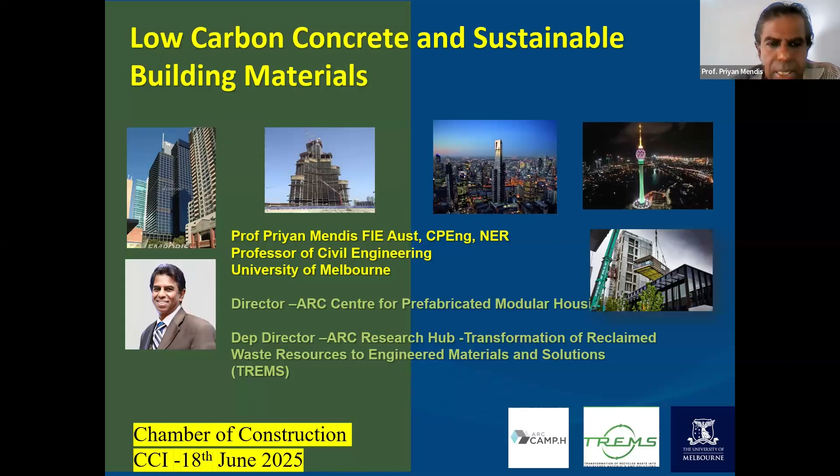On the left-hand side, the top, is where I entered the concrete industry after my PhD, when I was working as the structural engineer and also project engineer for this building, Telecom Corporate Building, is where I started using very high-strength concrete - first time in Australia I used high-strength concrete. The one on the right-hand side is also at the Telecom Corporate Building where I was a project engineer.

In that project, I had a chance to introduce 65 MPa concrete. Even at that time, we didn't know much about very low carbon concrete, but I tried my best to be sustainable. Sustainability was a name we all knew, but I think we have gone a lot further now, which I will talk about today.

On the left-hand side is Petronas Tower. That's where, when I was studying, I had exposure to one of the best concrete technologies in the world. I need to acknowledge one of my mentors, Ken Day, who has visited Sri Lanka. He got me involved in the foundations of the Petronas Twin Towers, even while I was studying at Monash. With that introduction, I learned a lot from him working on that foundation structure.

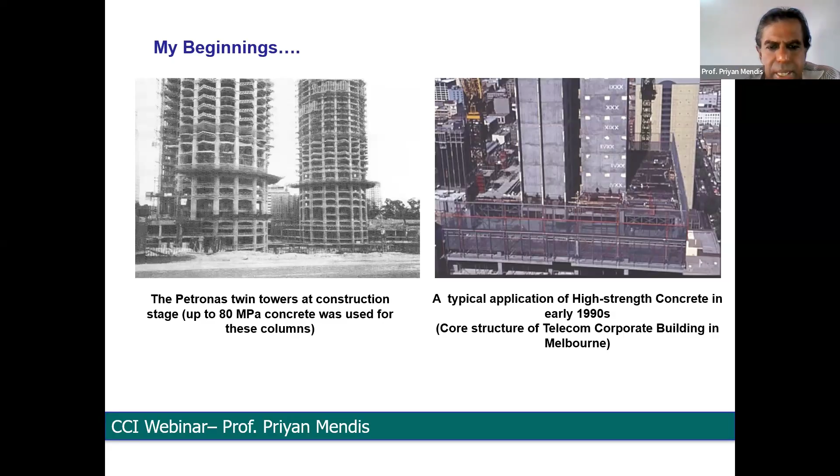Since then, I worked closely with him, and I also chaired the High Performance Concrete International Committee of the ACI, American Concrete Institute. He was with me all the time, and I need to acknowledge him because he taught me a lot about concrete technology. There are other mentors for me too, like Professor Mehta, and a few others I can name—even Neville, who I've met and who gave me advice at that time. So these are some of the leaders I had a chance to associate with.

Coming back, this recognition is for outstanding service to the concrete industry—the highest award given by the Concrete Institute of Australia, admission to honorary membership. In 2017, the president of the CIA, the Concrete Institute of Australia, gave me that award. That is the highest recognition, as I said, in Australia, and I'm very grateful for it, basically for service to the industry.

Then I had the opportunity to work on the columns of the Burj Khalifa, the tallest building in the world. I learned a lot, even attending workshops, and my work was confined to the design of the high-strength concrete columns, the rules, and using them. It's a landmark building that's still the tallest in the world at 828 meters. If I have time for questions, we'll talk about the challenges of building the Burj Khalifa. Again, I was only involved in the columns, but I got to know a lot of information through workshops and other communication.

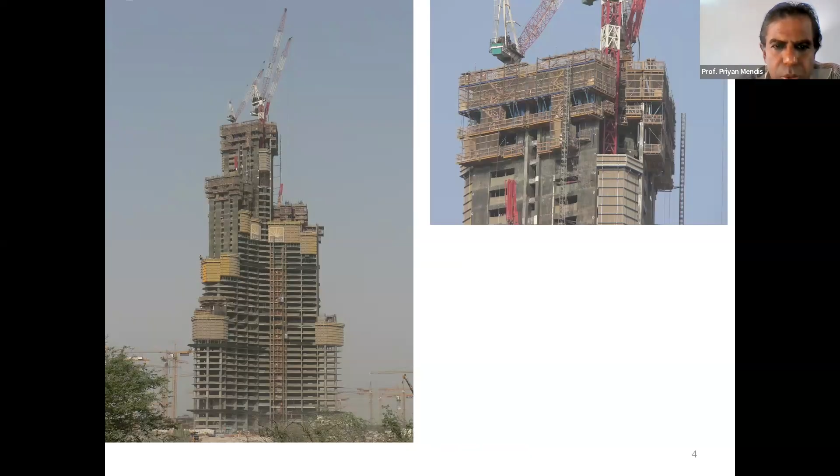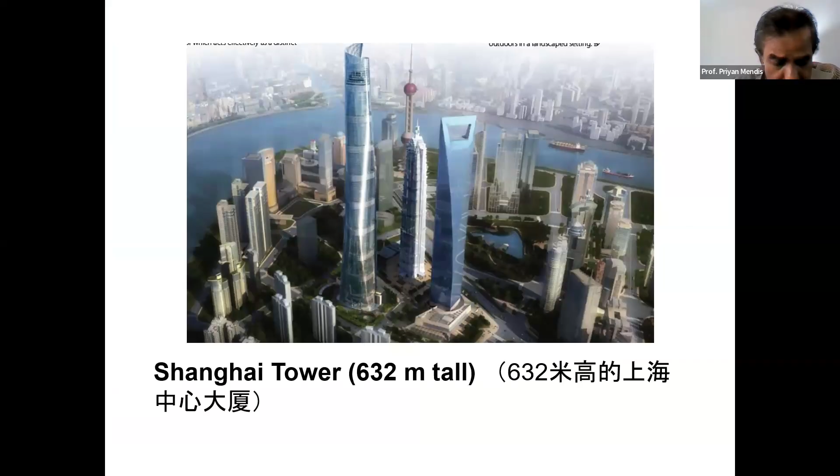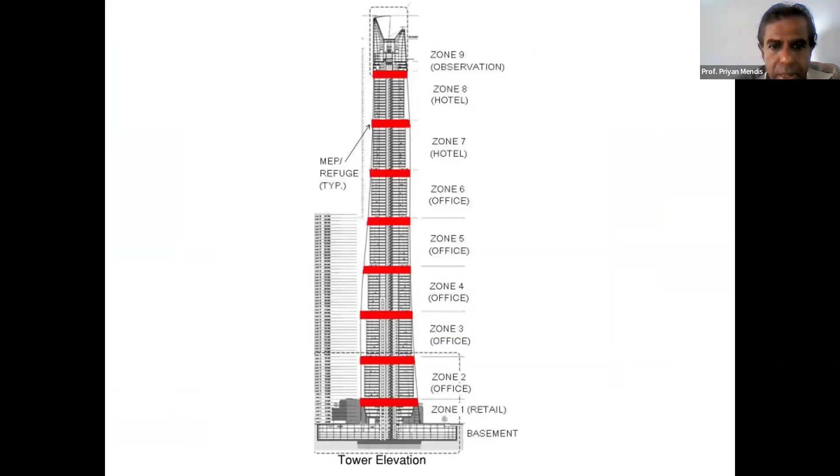Then there's the Shanghai Tower—I'm mentioning these examples because they're sustainable, high-performance concrete examples. At the time these landmark structures were being built, the Shanghai Tower was the second tallest building in the world, still standing at 632 meters tall. It's a unique structure that I won't go into here since I've talked about its other features in my tall building lectures. It's a building with different floors and zones.

In this project, my involvement was that the Victorian government nominated me for a formal project with Shanghai Construction Corporation to help them with high-performance sustainable concrete. Mr. Gong, my friend, was the project director leading this project. This is when the concrete was topped at 506.9 meters.

The pumping record was broken on the Shanghai Tower. I happened to be there that day just visiting, because I was part of that project from the Victorian side, Australia's side. These are all learning experiences for me on the practical side. I can do many things in the lab, but getting this practical exposure is something I really value, not only in Australia but in other countries—I'm now working here in Sri Lanka as well.

I have to acknowledge Mr. Shomal Fernando. Working with him, we have made a lot of innovations in the Sri Lankan concrete scene as well.

So coming back to my talk, the outline will be: introduction to low carbon concrete, then some applications in sustainable materials, and then I'll touch on where we're going in the next decade towards net zero, which is not too far away. We had to really do something now—that's why CCI bravely got into these sort of areas. Continuing the outline, we'll cover new opportunities and research directions in structural and materials engineering, not only for researchers but for the whole construction industry. There are new opportunities being created because this is very important.

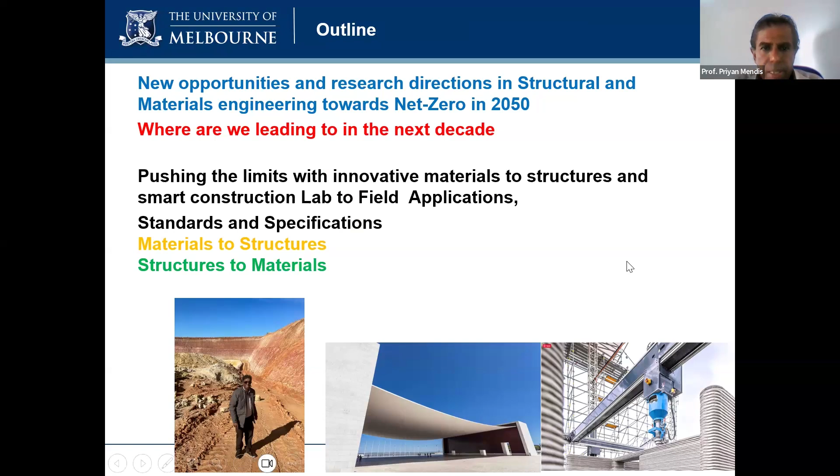Coming back to, let's not spend time on this, we all know about why we are doing it - the carbon dioxide - we are doing it for future generations. We have very dangerous emission levels still, so we need to do something. We know this video shows the temperature changes from the 1800s to where we are heading. So climate change is real now.

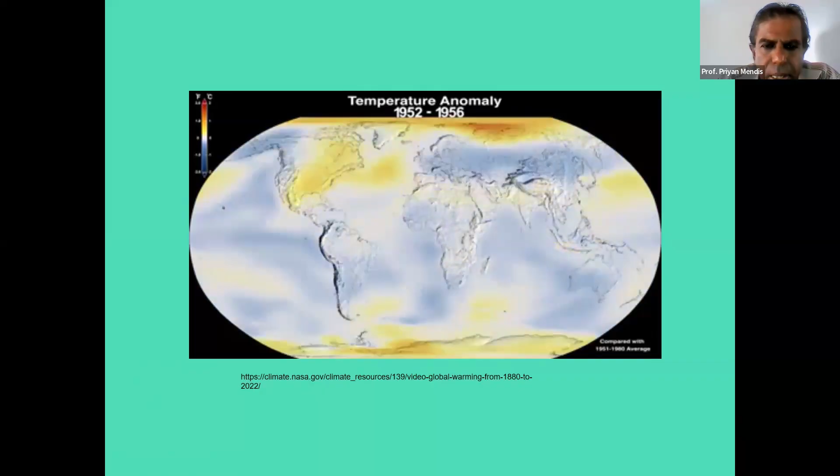At that time when we started, a lot of people didn't believe - even in America more than 50% didn't believe in climate change. Now almost everyone believes in climate change. So at least positively, people are thinking climate change is happening everywhere in the world, and we know that this is real.

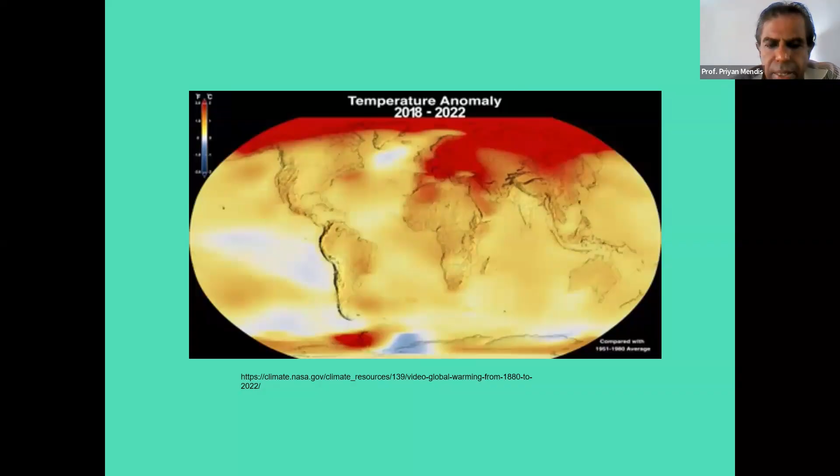The temperature changes until 2022 - you saw how we started in the 1800s and where our temperatures are now. We are at very dangerous levels of temperature. Unless we do something, this impact will continue, and it's really dangerous. Earth will continue to warm, and the effect will be really serious, bringing consequences. So we need to do something for the next generation.

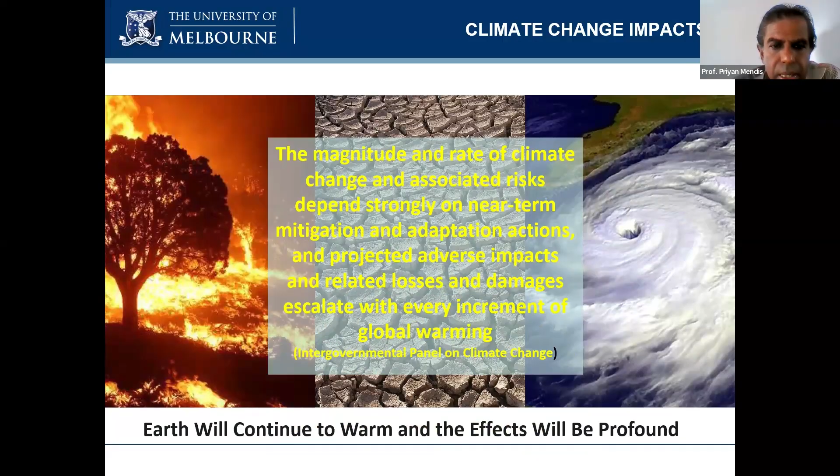So let's not talk too much on COP26. We all know about the UN SDG goals, Sustainable Development Goals, and we had to reach carbon neutrality by 2050. We are behind, and the recent UN report says we will reach at least 2 degrees. COP26 said 1.5, but we will reach about 2 degrees. So it's still at a dangerous level - we need to do something.

This is an important statement: construction industries use about one-third of the emissions of the world, and half of those come from two materials, steel and concrete. So mainly concrete is one of the main materials which brings these carbon emissions. We use half a ton of cement per year for every person alive in the world, whether we like it or not - everyone without knowing it is using half a ton of cement. So we need to do something.

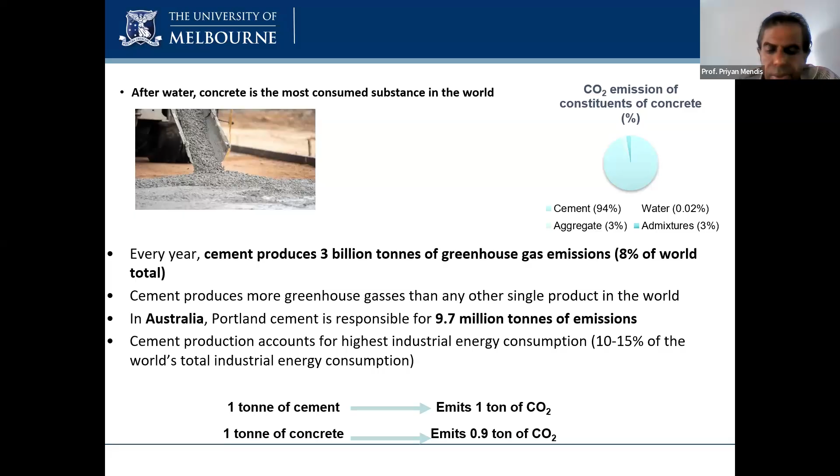I didn't have that chance when I was studying, but all the younger people have the chance with Google and now even ChatGPT or DeepSeek. You can put in these words and get a lot of information.

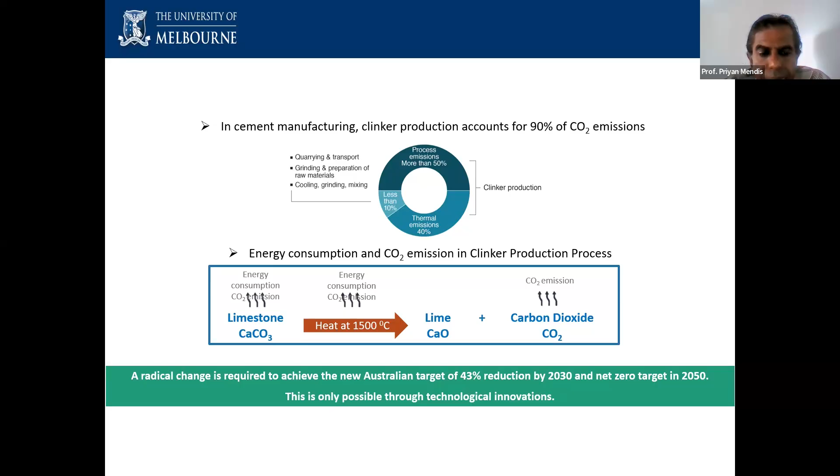But with the limestone, the reason is that in cement production, calcium carbonate is heated to around 1500 degrees in the cement production process, to convert into lime, CaO. That emits CO2 when the CaCO3, calcium carbonate limestone, is heated at very large temperatures.

I will not go through the whole cement manufacturing process, it's really going through clay to limestone to rotary kiln. That's where the damage happens, at 1500 degrees and all that, and then going through the cement manufacturing process that you can read from the web.

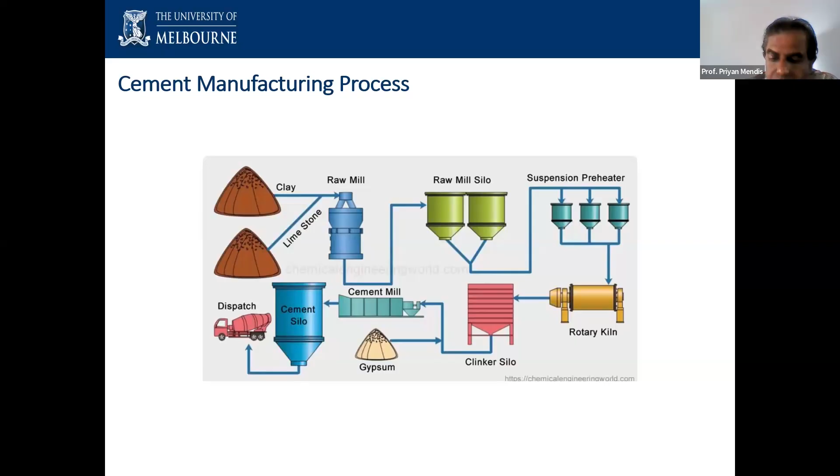This is the critical period for change. We know we will reach net zero we want to reach by 2050, but we can't wait until that time. So the most critical period is until about 2035, the next decade is the most critical decade.

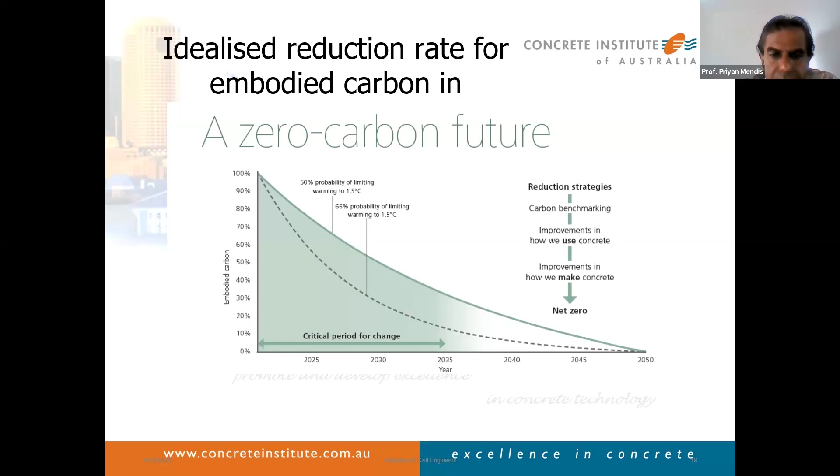So we all have a responsibility, we can't wait until later on. It's already late in doing things. So as a world, not just Sri Lanka but the whole world, we need to take urgent action. Things are happening, started to happen, but we need more work to be done.

So let's go to basics, and go back and work on the basics to make it sustainable. We have cement, so cement is the problem. And with water, sand and gravel, we can think about them as fillers, but we can think about really making them sustainable as well. So we can go back to basics.

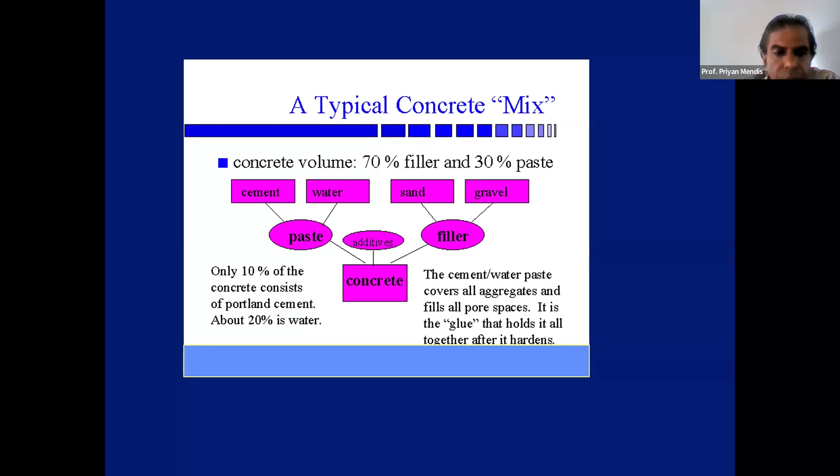I'm not going to teach the basics of concrete today with this limited time, but we can see where cement, water, sand and gravel fit in. So paste plus filler is the concrete. We will go back to this and do the fundamentals.

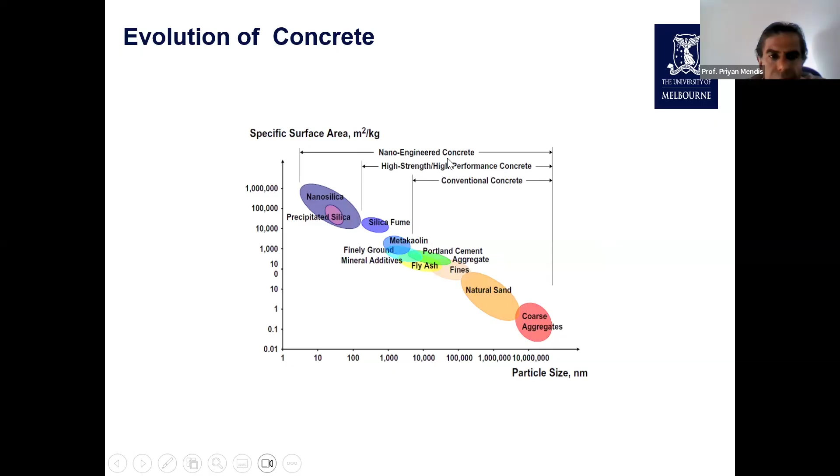These are the things we are going to do in the next few years. This is where I did lots of work, including changes in the Australian code. I took a leading role to reach 120 MPa, probably one of the highest in a systematic way in the world. I was leading that way in Australia, and we have done a lot of good work in high strength concrete in some projects in Sri Lanka as well.

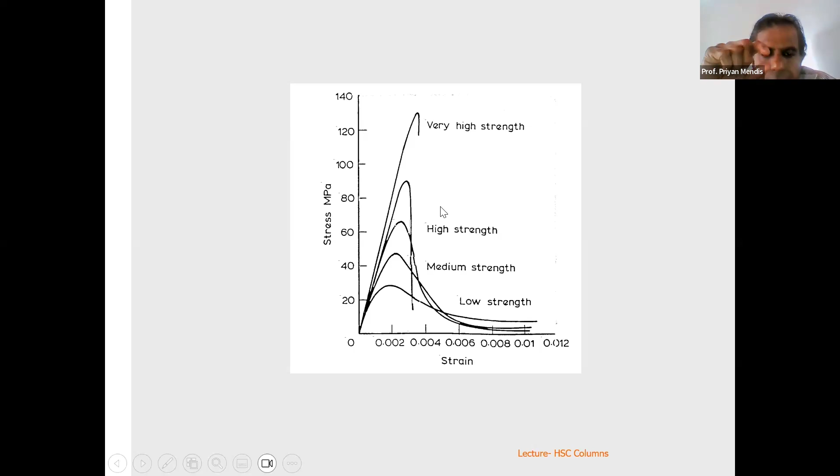By having high strength, you can reduce the sizes of the members, not just the materials. We need to work on the sizes of the members as well. So high strength is obviously a good choice to make it low carbon, reducing the sizes of the components and members of a building or other infrastructure.

So getting to high strength, the problem is it becomes brittle, because we can see the straight line. I will not go into all the basics, but it becomes brittle. For low strength concrete, it's very ductile, like a parabolic curve. But with high strength, it goes straight, and then fails very brittly.

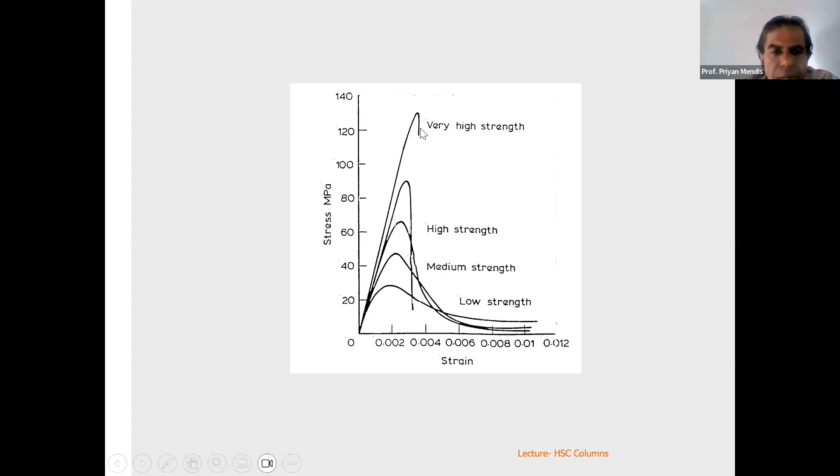Coming back to high performance materials for the future, and lightweight, high strength materials. We need lightweight materials, high strength materials, durable materials, affordable materials, and also environmental friendly, low carbon, sustainable materials. So we need to look at all that.

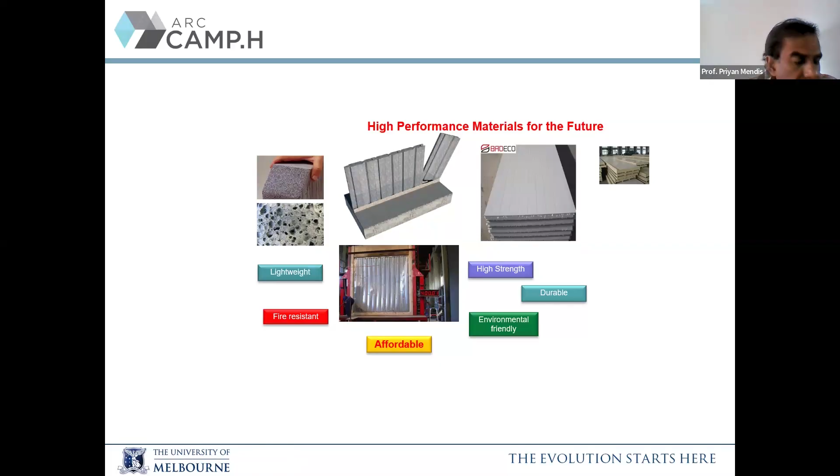So we had to work backwards from the performance. I'll give some solutions in the next few slides where we could really go through, and in future talks I can talk in a bit more detail on some of these topics.

So it is really how to decarbonize the construction industry. We have to look at zero carbon or low carbon materials development - that's why we're all here today. And we need to really develop an evidence base. When you develop new materials and field applications, we need to have an evidence base. That evidence base is really quite important.

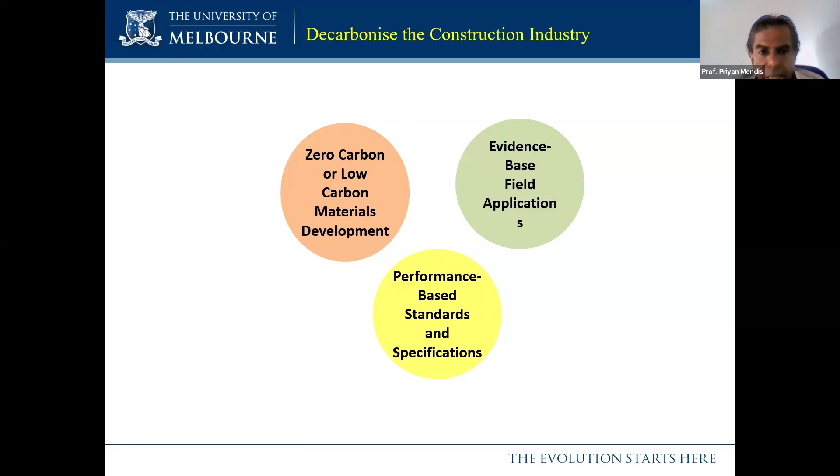We need to change the performance-based standards and specifications, and bring all that together to really make it successful. We can do anything developing materials, but we need to confirm that they work, especially longer term, not just short term. Then we need to change the standards and specifications, and make sure the people doing the standards and specifications are involved.

That's what I'm doing in Australia - I'm leading a concrete code. There's a subgroup also using these low carbon materials, so we are trying to encourage them in the industry. And with the specifications, we want to really change the specifications.

We have drivers and barriers. The policies are the drivers. We need to really look at net zero targets. We all have to look at the end of life considerations as well, and we need to do what's called life cycle analysis - whole life of the structure, building or infrastructure. Australia has developed carbon credit units, like all countries.

I'm sure it'll come to Sri Lanka as well. Carbon credits are really valuable - it's dollars and rupees type of value. So there are incentives for really using low carbon materials. In Australia, it's compulsory to use low carbon materials. Industry - the clients and all that - really have to comply with the rules. I'm sure in Sri Lanka also this will be introduced, making it compulsory to use low carbon materials. So this webinar's timing is really good timing towards all that.

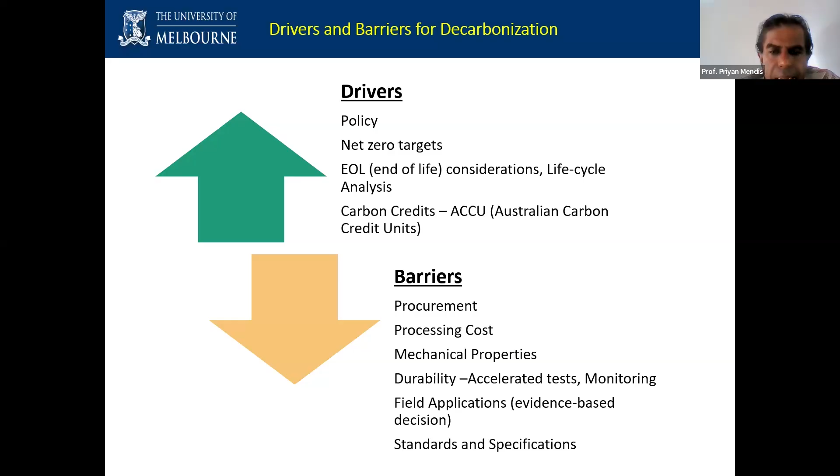So barriers include procurement - how to procure the material, and this is a problem for the construction industry. There's processing cost. We need to look at mechanical properties, the short-term properties, and durability, long-term properties, field applications, and standards and specifications. So there are barriers - we all have to work together, not just people developing materials or designing components, but the construction industry as a whole has to work to achieve this.

So how can we reduce or remove carbon emissions? To really do that, we need to use less cement - obviously if cement is the polluter, we need to use less cement. And we have to increase the recycling rate. We had to use recycled concrete. We are demolishing a lot of concrete, so why not reuse? So there are issues.

I'm doing a handbook now for Australia on recycled concrete aggregates in concrete. So really we are encouraging higher levels of recycled concrete aggregates. At the moment, we are allowing only 30% of recycled concrete aggregates to be used in practice. We are doing some guidelines trying to improve that recycled concrete use in Australia.

And the third one, if I have time I'll have a slide, is geopolymer, which is cementless concrete - we call it inorganic polymer concrete. Again there are ways of doing it. We are using alkali activation - alkali activation is a key word to achieve low carbon concrete. So we're doing a lot of work, and we are also trying to develop some natural activators, not just chemical activators. So this is an area for really the future for Sri Lanka as well.

I try to use geopolymer concrete. I remember working with Mr. Ravi Vishankar at Millennium Concrete, pouring geopolymer concrete about 10, 12 years back, doing a trial. But I think since then, it's been slow in the world to really be used.

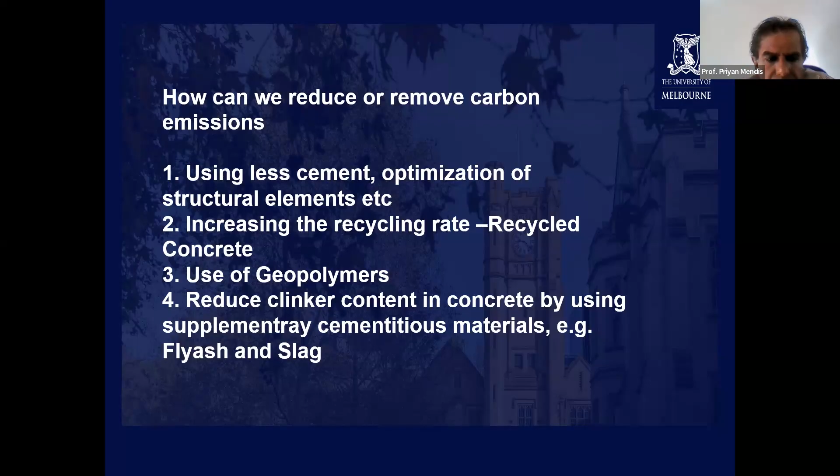The fourth point, which is quite important, is to reduce the clinker by using supplementary cementitious materials. I'll talk about that a bit more on the slides. We need to add these supplementary cementitious materials to get to low carbon concrete waste materials.

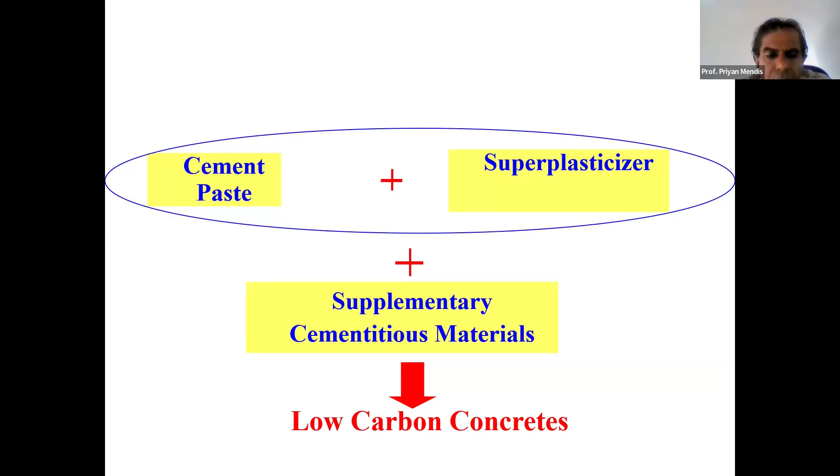For some background, with cement paste we use superplasticizers to improve the workability and flowability of the concrete. We use that for almost every concrete now. Then we add other material which will really improve the properties. Silica fume, for example, is a waste material.

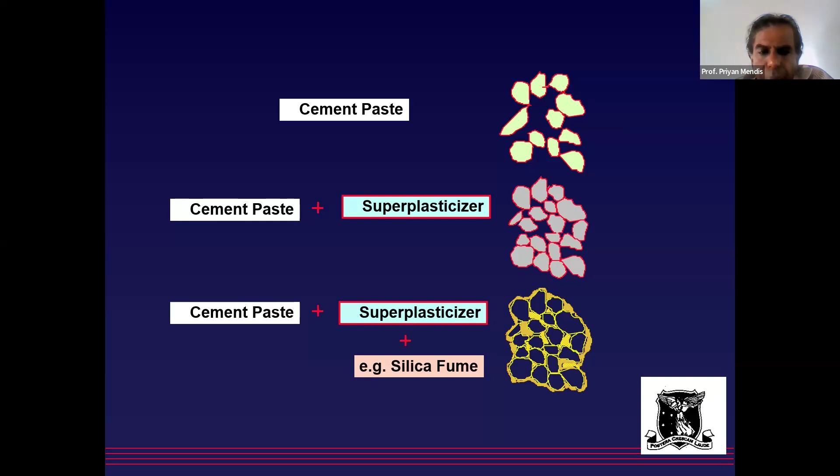These are called pozzolanic materials, and they include natural pozzolans. Natural materials include fly ash, slag, silica fume, and even rice husk ash. We have a lot of rice husk, and I remember doing a pilot project on rice husk ash here a long time back with another university.

We got somewhere with that. I think we need to do a bit more systematic work. At that time, when we were doing that work, the encouragement wasn't there. But now with these new sustainability concerns, even in Australia and other countries, there's a lot more interest now, so it's easier for us to do this work.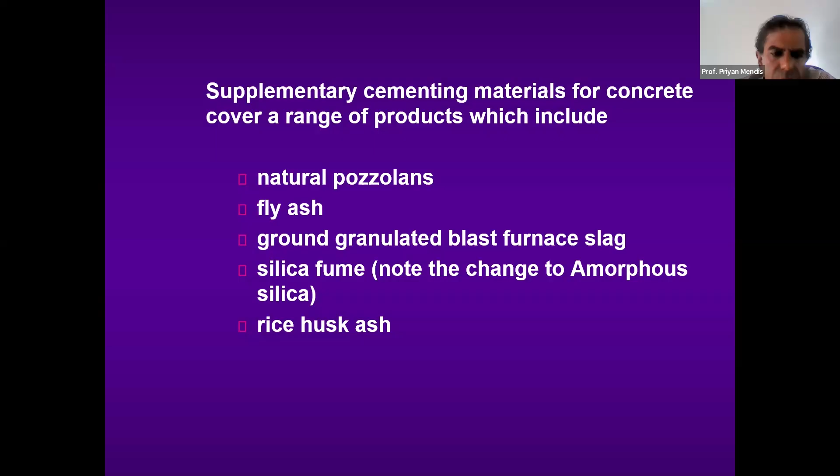Workability is really something important here. It's not a lesson on concrete, but with these low carbon materials we need to make sure the workability is there. The reason I'm putting up this slide is that people have gotten into trouble trying to use low carbon materials but run into workability issues. The ease of placement and cohesiveness in concrete is lost, and consistency and ability to flow is lost. So we need to carefully design the material.

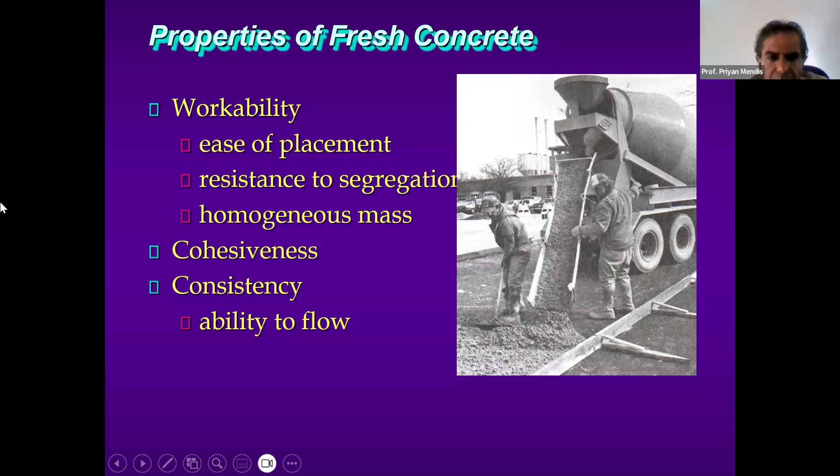That's why we need experts to do that, rather than someone doing backyard concrete. We can't do that in an important construction project. We need specialists, engineers, architects to be involved. That's why construction industry people and technologists all have to get together and do this work. We can't just ask an ordinary layperson to go and pour concrete, which may be happening in some places. But anyway, let's go to the next one.

This is fly ash. Very quickly, coal-fired power stations, Norochcholai is a good example, produce fly ash, which is really a waste material. There's also bottom ash which we can use, though it's not as favorable, but some people have done work on that. Fly ash can be removed as a fine dust, and it's a very good material.

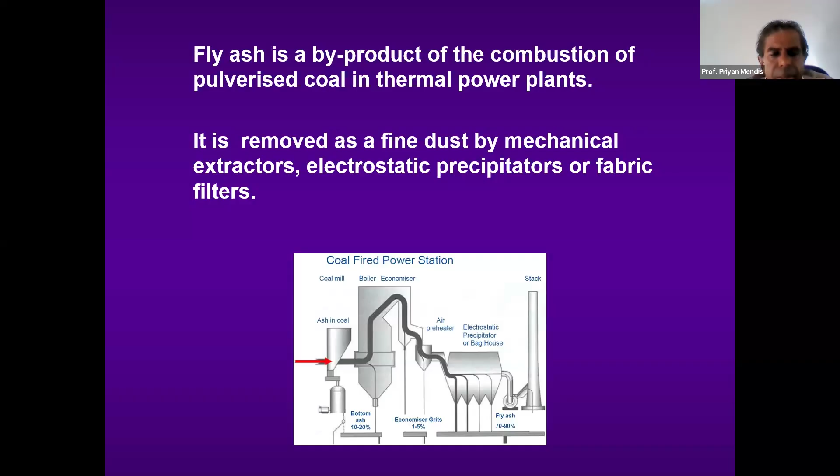However, on the world scene, coal-fired plants are closing, and Australia is closing them very quickly. By 2030, all coal-fired plants in Australia will be closed, so we will not have any fly ash being produced there. I'm sure here Norochcholai and others will continue, but many countries are closing coal-fired plants, so fly ash is going away. That's why we are doing work on calcined clay as a replacement.

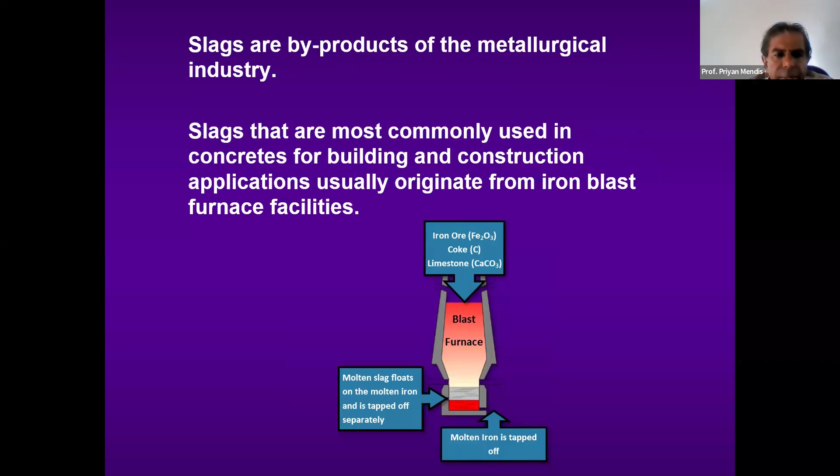Slags are the blast furnace slags from the iron furnace. Slag is a very good waste material, it's pozzolanic, meaning it improves the concrete reactions. Today I won't talk about the reactions, but it helps concrete.

The other one is microsilica, coming from the ferroalloy industry. It's expensive and not produced here in Sri Lanka, so it's imported. Silica fume, or microsilica, is necessary to really get to very high strengths of concrete, so it's an essential component, an amorphous type of silica we call microsilica, needed as an ingredient to produce high strength, low carbon concrete.

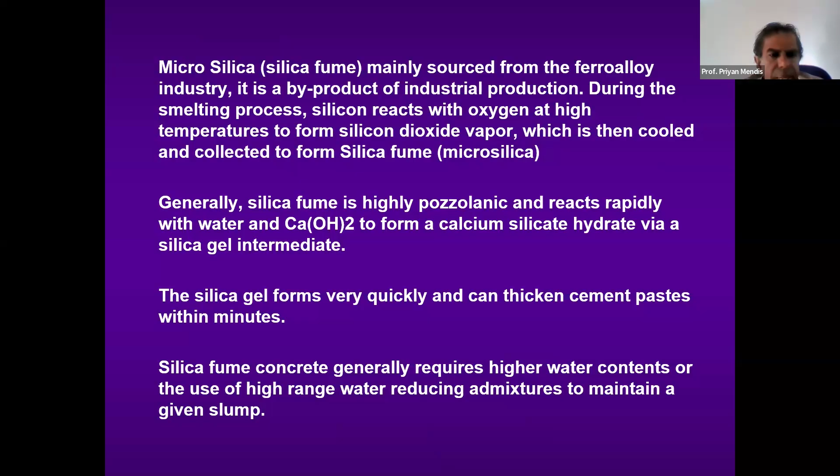Let's run through very quickly some other innovations on my side, as examples. I'm one of the pioneers, at least in Australia, using some of these materials, and we've brought that here. I'll show one example: metals like steel, aluminum, copper, concrete, asphalt, pavings, timber, gypsum, roofing, bricks - why not recycle them? We should be recovering and recycling them.

We didn't have this push before, but now with this new low carbon sustainable materials focus, we need to recycle all sorts of materials, and that's something researchers do, along with other R&D work supported by the industry.

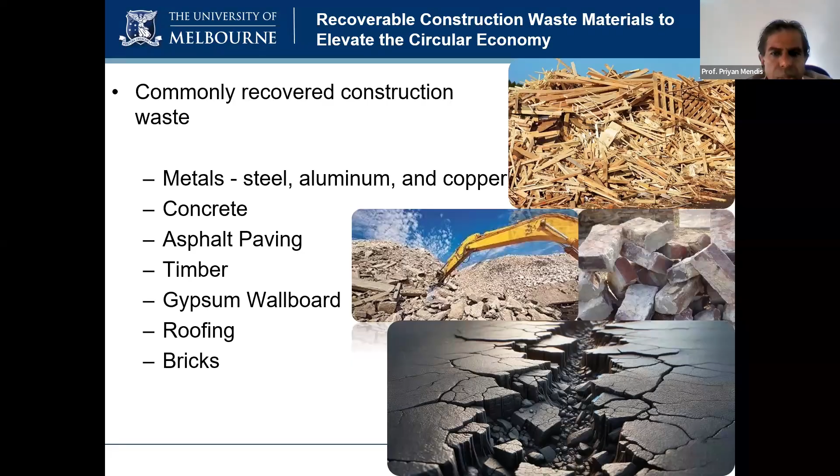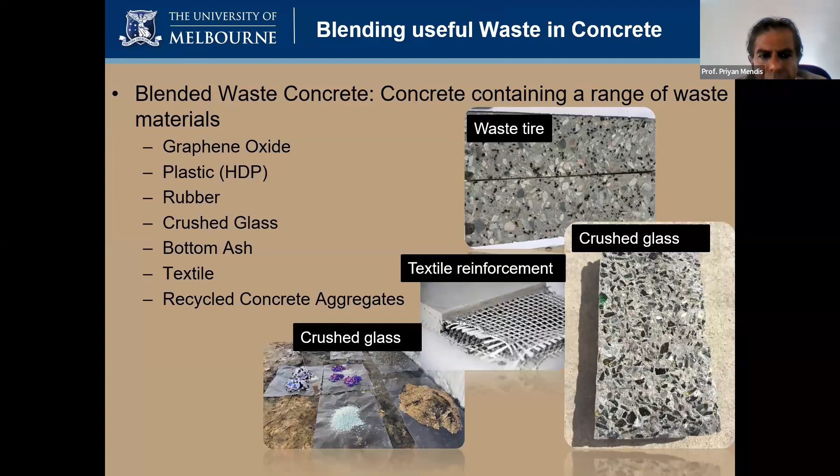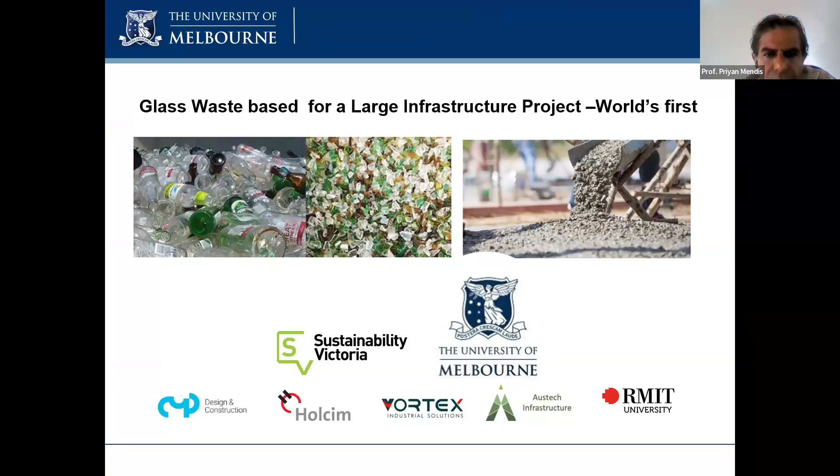The glass - in a large infrastructure project, my group used glass waste for the first time in Australia, glass in concrete. There are other challenges that happen, I don't have time to talk too much, but the glass was hitting the pumps. So it's different types of problems that we get in the lab when you go to the field. That's why people are reluctant to use these materials, but let's work together and try to use some of these sustainable materials.

Solar panels are now being outdated, some have been removed, even here I've seen it happening. So where do we throw them? We can't - in Australia we're not allowed to throw them. We need to get the glass, there's a lot of glass in the solar panels.

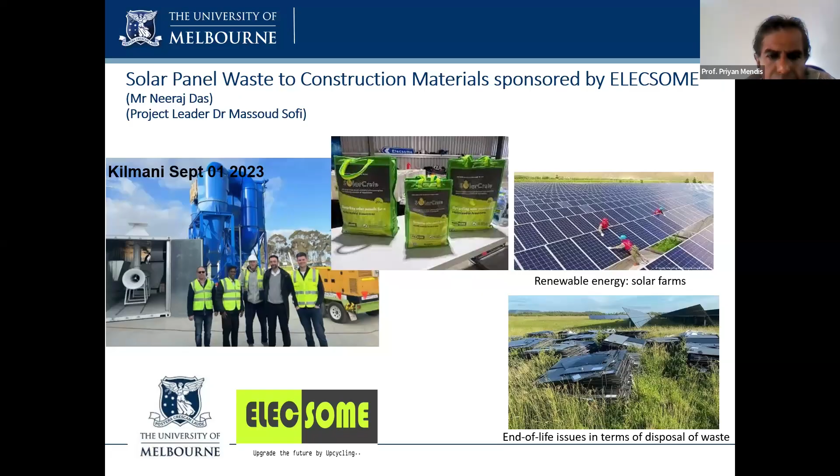So I was leading this project - the Solarcrete name came from me to the company. Elecsome is a company, they have a commercial plant now converting these solar panels into solar glass that we can use in concrete, because we are running out of sand and all that. So even there we use some waste materials. You can look at the Elecsome website.

The other project we are doing is converting plastic into sustainable materials, plastic sorting. Even in construction products where we were using plastic products, we are now trying to use recycled plastic type materials. So we got a robot doing that work.

This robotic work is still in our lab project. Humans can't do this accurately, we need to get robots to do that. So we got a really full-scale facility developed.

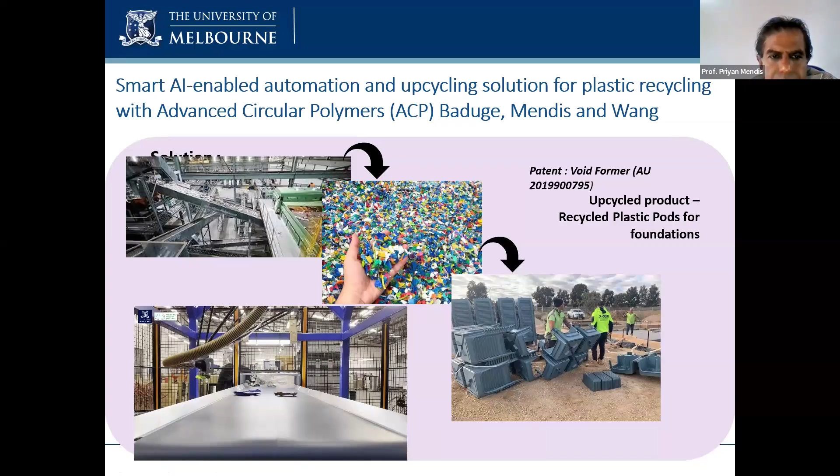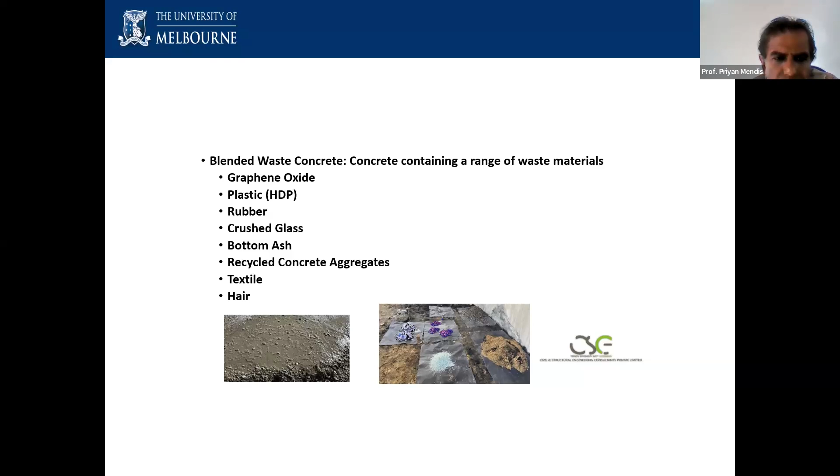So where are we heading forward? In this short talk I'm getting to the end, but moving into the next decade towards a net zero system, we need new innovations - we can't just go on like this. So we have to talk about new innovation, that's where I'm working. We have a lot of work to do on carbon dioxide capturing. In cement production plants, which is really still new to the world, in one or two places they're trying it out now - we are really capturing the carbon dioxide.

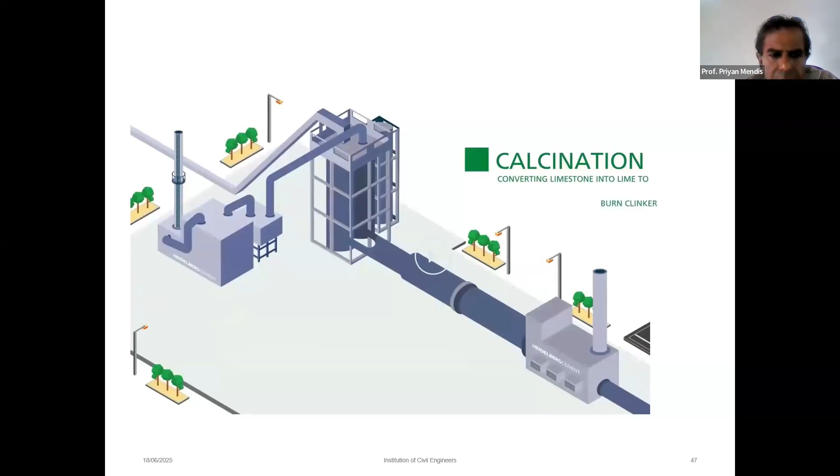This captured carbon dioxide we are going to use in different applications, which I'll briefly mention. So this thing happening - capturing the carbon dioxide from the cement production process - will produce a big solution for the problem with concrete and get us into low carbon concrete levels.

The other one I already mentioned, the geopolymer type of technology, is essential - that is cementless concrete. We use what we call precursors, different materials - we can use fly ash, slag, clay, also even rice husk ash, and many other materials. On the other hand are alkali activators, sodium hydroxide and sodium silicate type materials. We are now trying to use natural activators as these alkali activators. Then we get what's called geopolymer concrete, or inorganic polymer type concrete.

So it is really that process that we can produce with sodium. For those who want a bit more detail, it's silicon aluminate type processes - we go through not the usual calcium silicate hydrate, CSH type of reactions in concrete. If you want to go a bit deeper, I'll leave that for another time.

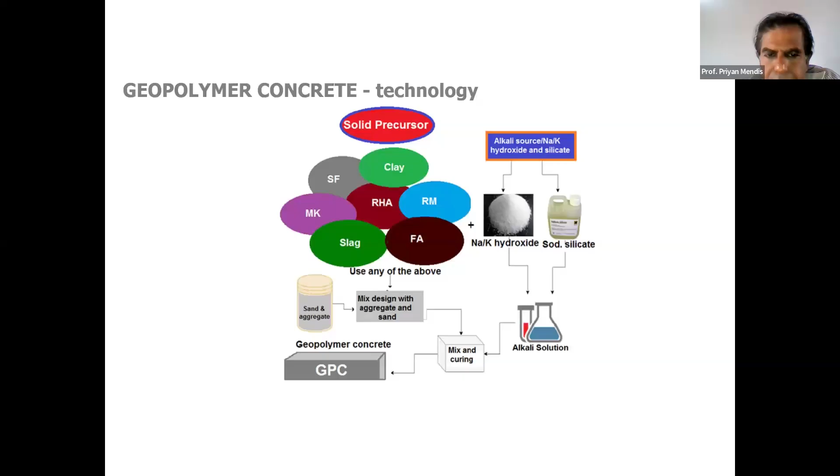Another one is an innovation. I'd give a lot of credit to Karen Scrivener in Lausanne for coming up with LC3, low carbon material. It's been known for a long time, but this is something we can do with ordinary Portland cement, fly ashes, and blended cement, adding limestone and calcined clay. Rather than fly ashes, we take clay from waste material and heat it to about 700-800 degrees to get calcined clay. With limestone, LC3 is really replacing a lot of cement in the clinker, so we can reduce emissions by half or more.

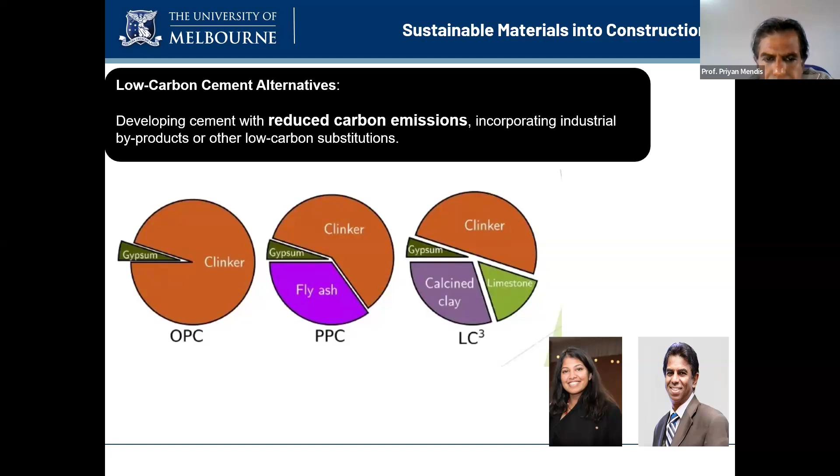Anuradha is working very closely with me as one of the research fellows now, after a very good PhD in concrete. She's the one leading that work with me.

It's really magnesium-based cements that are coming up. You can look for that. Today I'll be very brief - just a couple of slides. Magnesium-based cements are a promising low carbon alternative. You will see a lot more in the future for low carbon materials, the magnesium-based cements.

Magnesium-based cements can absorb carbon dioxide during curing, so all the captured carbon dioxide can be absorbed by this type of material. That gives us that full circular circle - the carbon dioxide captured from the cement production process can be used with these materials and converted into very valuable materials. So look for these magnesium-based cements in the future.

I don't think it's come here yet - these are all early stages. That's something in the next decade we need to do a bit more work on. I've got one, probably a couple of projects now looking at this. I'm actually not calling it low carbon now - we are working on net zero concrete, going to the zero levels. But it's probably too early. We need to start with low carbon concrete before net zero.

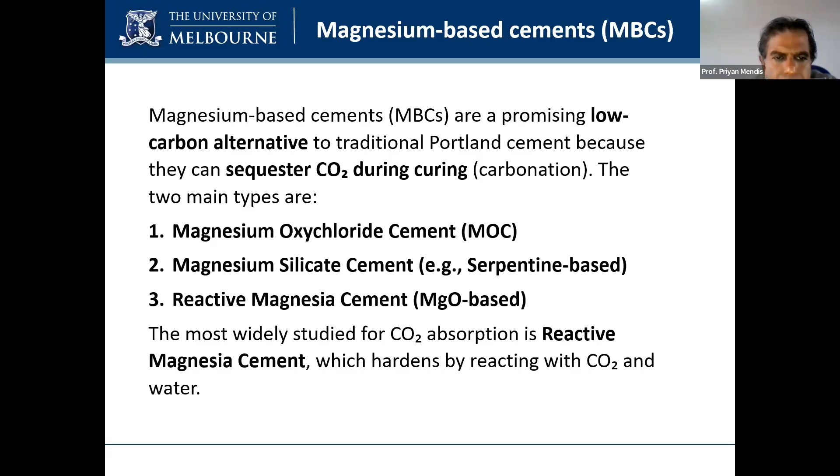The other one I'm working on, which I'm already able to disclose, is even some newer rocks - we have in Australia olivine, which can absorb carbon dioxide. This has been ignored in the past. It's some volcanic type of rock. So we are using that to really absorb carbon dioxide. This is newer work which we got a grant for. Myself, working with one of the leading professors from University of Sydney, Professor Ransi, we got a grant to work on this - looking at olivine absorbing carbon dioxide and getting what's called net zero cement.

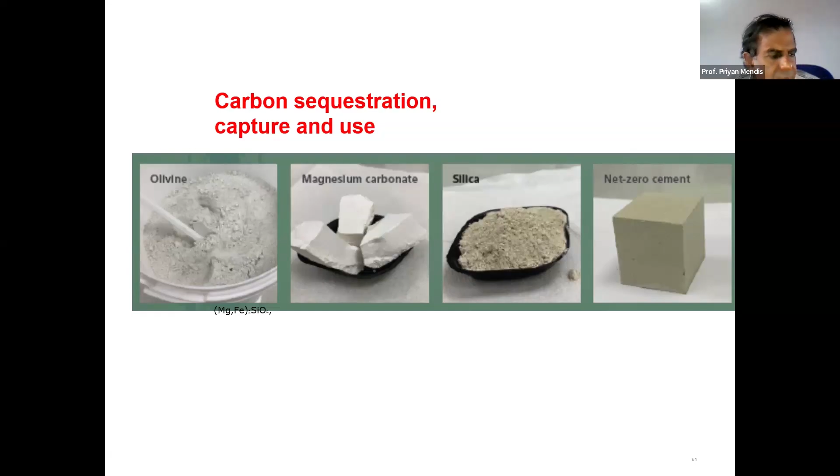That's something for the future - I can really talk hours on these different techniques, but I'll do one last slide and stop there.

Recycled concrete aggregates - another thing we are doing is passing carbon dioxide through recycled concrete aggregates. Recycled concrete aggregates are weak because there are two layers - one is an old concrete cement layer, the other is a new cement paste layer. So there's a weak layer around the aggregates. That's the weakness, which is why we can't use too much recycled concrete aggregate. So we are passing carbon dioxide through that, and it will convert that layer around the aggregates into a very stiff calcium carbonate.

That captured carbon dioxide from the cement production process can be used to improve recycled concrete aggregates. Our initial trials show we can improve and increase that percentage to almost 100% recycled concrete aggregate use if you have carbonation. That's another area where we can really see things happening in the world in the next few years.

I'll keep you updated on the international scene, since I give talks from time to time.

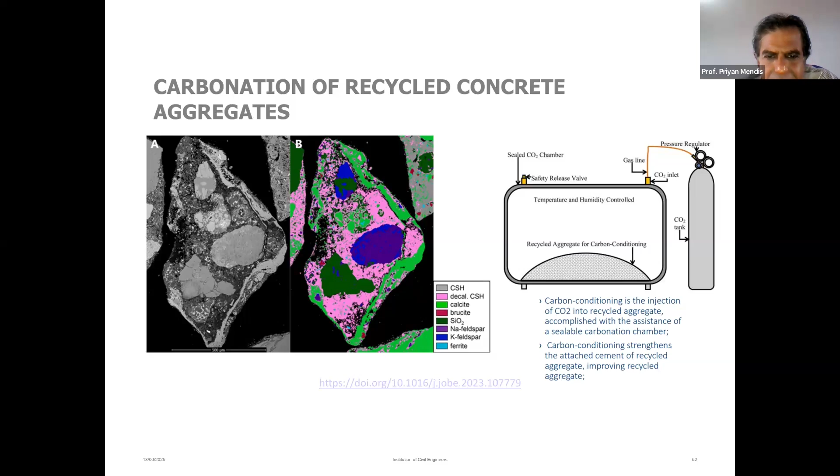I want to thank the ICE for taking this initiative to cover this important topic. I know it's a limited time, but I've tried to say what I can, where I could talk for hours and hours. But this is a summary of where we are heading on low carbon concrete and generally incorporating sustainable building materials.